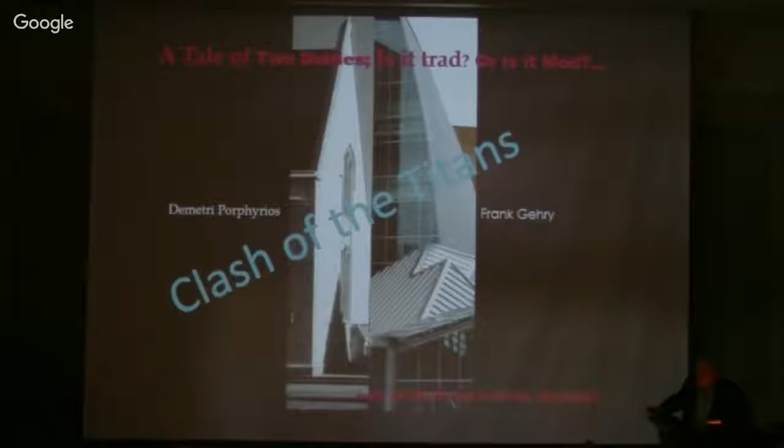At the time, there were two buildings happening at Princeton, one by Demetri Porphyrios, who I'm sure you know, and another by Frank Gehry, who I'm sure you know. They were about 1,000 feet apart from one another. Here is Demetri's building—it's a residential college for about 450 or 500 students. There's a great long walk that runs through it, near the southern end of campus, past a couple of other residential colleges, and it ends up right at the crux of Frank Gehry's building. So these happen simultaneously.

The world didn't really know what was going to happen—how could an institution make buildings that look like these two simultaneously? Is this institutional schizophrenia, or is it responsible development? In some senses, it's both—born a little out of fear, a little out of necessity, a little about what the donors were interested in doing. This is called Whitman College, whose principal donation came from Meg Whitman, who ran eBay for many years, a Princeton alumna.

And this was the gift of Peter Lewis, who was from Progressive Insurance Company, also a Princeton alumnus. He had done a lot of work and was enchanted by Frank Gehry. Frank Gehry designed a house for him—it took around 27 years to design and never got built. So both of these buildings were happening simultaneously at Princeton.

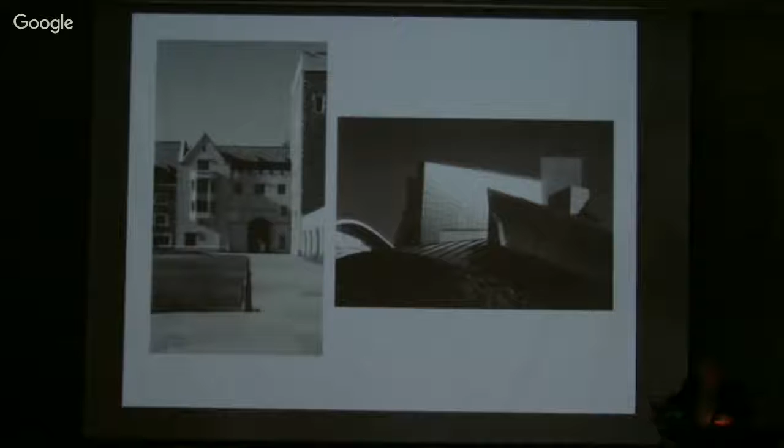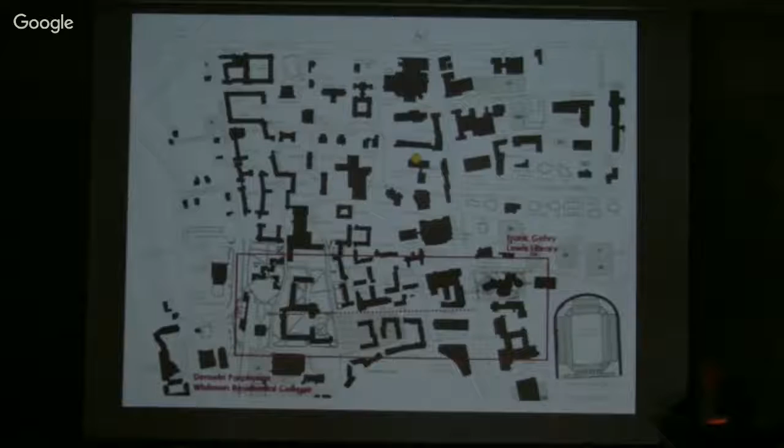Let me go back one thing—the first class I taught at Princeton when I got there was a third-year graduate studio, and that's where Demetri was sitting. At that time, he was a determined modernist, which was also interesting. Not to say it's a problem that people develop their thinking, because we all do, but it's an interesting transition period.

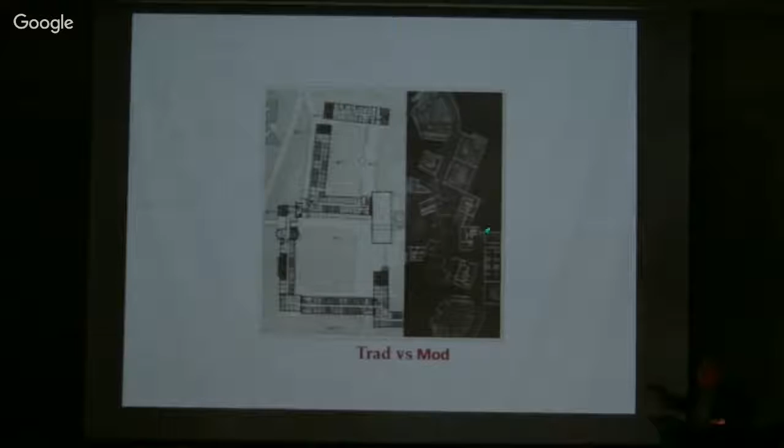So here are essentially the two plans: the traditional, configured plan that embraces space, as compared to the collection of objects that occupy space. That's model photos of each.

I got wonderful renderings from Demetri's office and wonderful CATIA drawings from Frank Gehry's office, where by using the registration marks you could assemble this building and see the various crazy skins go on after the structure was manipulated, etc.

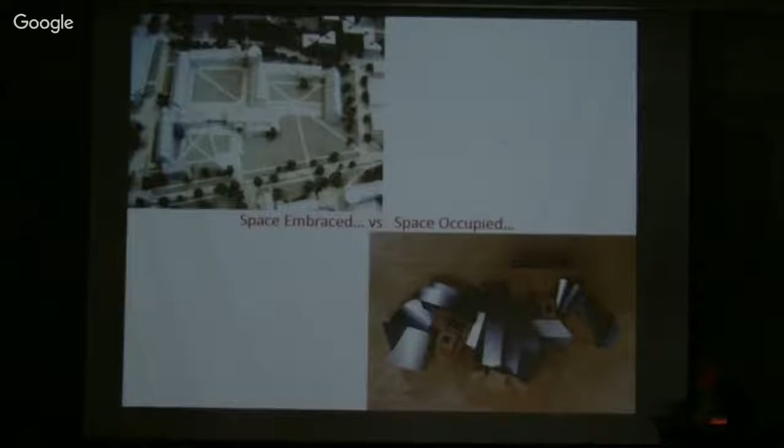So again, the extremes happening simultaneously on the same campus, and nobody really quite knew what to make of them. And people still don't know what to make of them. Because I'm an architect, everybody will always ask you what do you think about X and what do you think about Y. At the time these were going on, people were saying, what do you think about those two buildings going up simultaneously? The only thing I could say was, it's just kind of interesting.

You've got to evaluate them differently. You've got to talk about the Gothic building in terms of the other collegiate Gothic buildings on campus and see how they stack up. It's not a great thing or a bad thing to do that. And in terms of the Gehry building, you can't deal with it in conventional architectural terms because it's not conventional architecture. You think about it maybe as sculpture.

You can think about it in terms of its use as something of a social arena, because although it's called a library, it's actually one great big communal study hall where men and women students can meet one another, among other things.

Moving on, trying to find what the definitions of things are. There is no prescription for the way we live our lives. The Ten Commandments tell us what we can't do, and what's left over, the space in between, is where we can, what we can do. That's permissible. Follow that with our legal systems, and basically it tells you the same thing. You can't do this, you can't hit people with your car, you can't shoot them. But some of them are really quite akin to the Ten Commandments. How you conduct your life is what we don't tell you about in between.

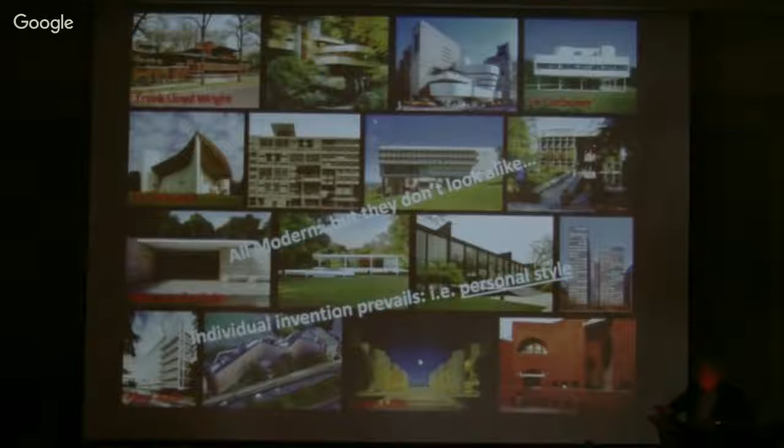A premium on invention. I think it's amazing that the fertility of minds is such a high level that without anybody telling people what to do, they and we collectively can continue to invent new and remarkable things. But personal invention, personal style.

Here, I think this is an interesting statement, and I promise you I wrote this before I knew that the accrediting board was coming. I promise you, I can show you this was printed at home, and it's on there. So good luck with the accrediting board.

They will bring skepticisms, as I'm sure you know because you've faced them before. I don't know what they do these days, I used to know what they did, and for a while they had the screwiest set of criteria where you define yourself to us, and we'll determine whether or not you fulfill your self-definition. If you defined yourself as a place that made motorcycles as a way to do architecture, and if in fact you were a place that made motorcycles, you'd be accredited.

But I think what's interesting is that because of the inevitably prevailing skepticism about a school that teaches and focuses on classicism and traditional architecture in today's world, where it's rampant technologies and so forth, I think it's inevitable that the school has to prove itself. You know that what you're doing is fine, but you do have to prove it repeatedly. And frankly, I think that's kind of healthy. I was the so-called director of architecture at Princeton when we had a visit, and so I was in charge.

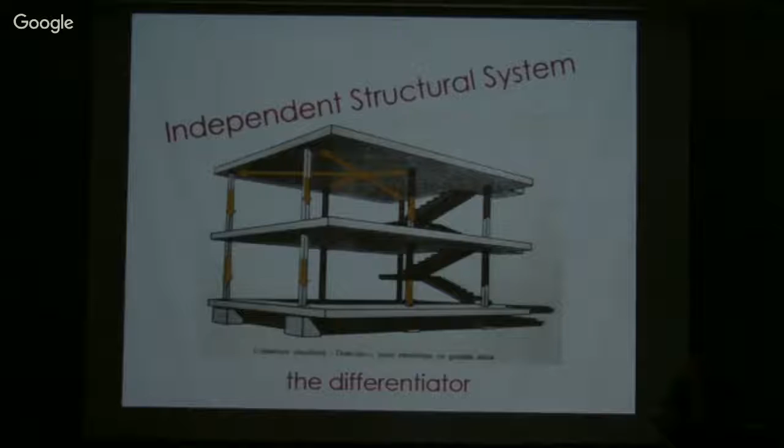But going to the comparison of the two, I think the first person who put these plans together this way was probably Colin Rowe, who was a dear friend who died a few years ago. Colin's article was about two buildings: one was Le Corbusier's Villa Garches, done in 1927, and the other was Palladio's Villa Malcontenta - I forget what it is, 1518 or something like that. It'll show up on a subsequent drawing. But the point supports - these points are exaggerated to make a point.

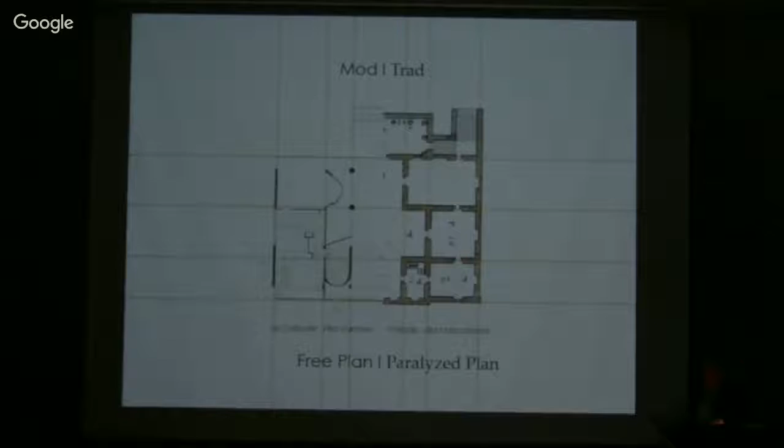The point-supported buildings permit the walls to be placed wherever anybody wants. Thin exterior walls, because they're not supporting the structure of the building or the floors, as compared to the cellular, heavy-duty, compression-absorbing walls of the Palladio house.

So if you look at this, it's got a free plan, but it's got these floor planes that are there, and they're insistent, and they have to be there because the columns have to hold them. Can you cut holes in that floor and have space go through? Yes, but inherently, it's still a horizontal planar thing.

As I said, it does liberate the facade. We'll look at that in a sec.

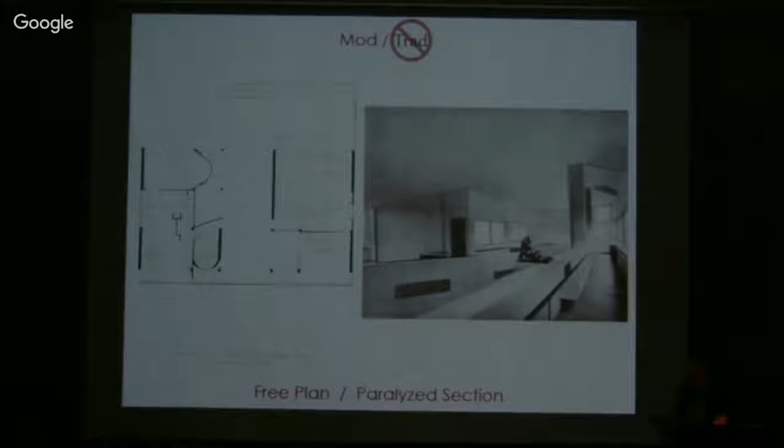By contrast, the essential characteristic of the cellular plan is what permits this to be shaped really as sculpted space, if you will, absolutely perfectly natural through the vertical extrusion, with heights determined by preference and design hierarchically. So the two are in some senses fundamentally divergent from one another.

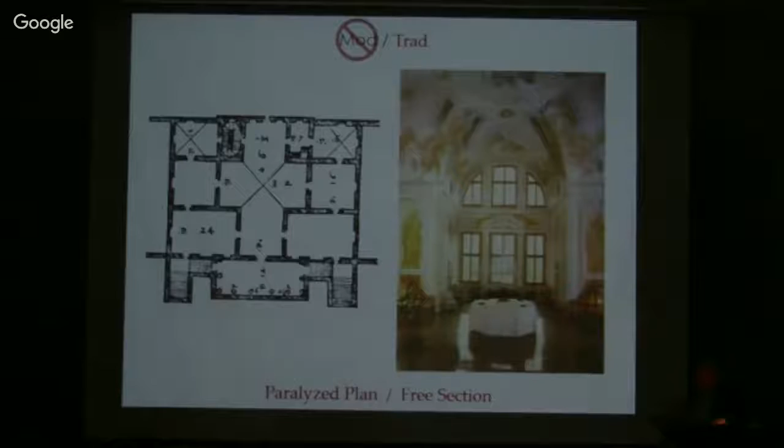So looking then at the two, try to imagine what it must have been like in the 1920s when you came upon this building for the first time, with all glass apparently visually supporting some great big mass - well, it's not really masonry, it's stucco, but you know that no matter what a building surface is, it's got to be heavy. It's an astounding condition that runs these ribbon windows through, and the only way that's possible is because the independent structural system enables you to suspend these great big solids from the edges of those slabs.

And imagine also trying to figure out what would cause one to say this building and this building are sort of cut from the same bolt of conceptual cloth. Well, the exterior is obviously not literally - so the previous slide that showed the grading of the interior, it's really about the underlayment of the organization of the plan that I'm talking about.

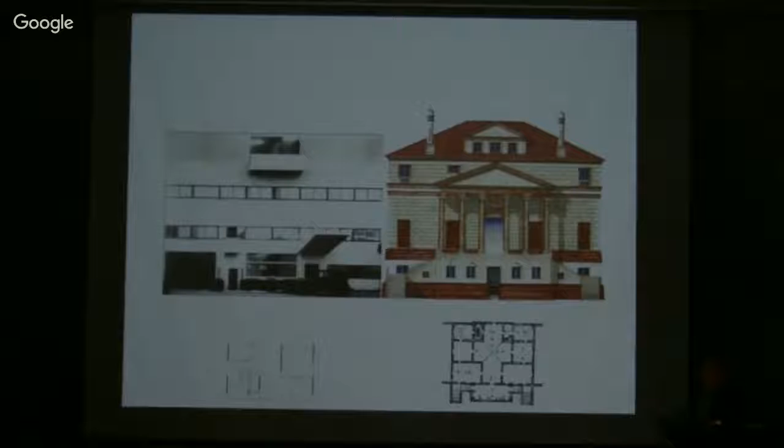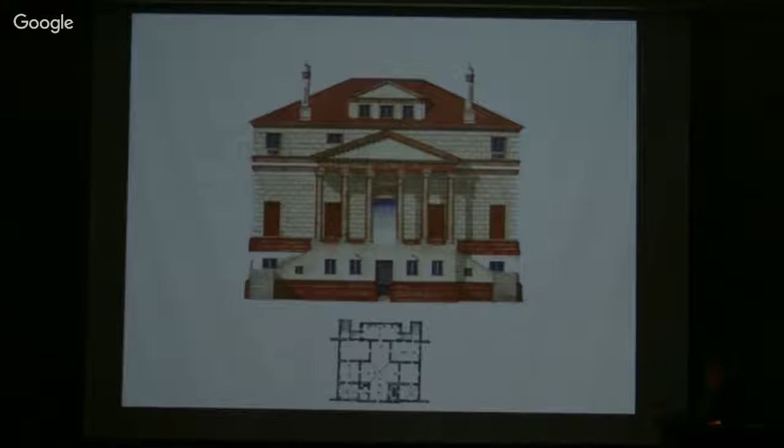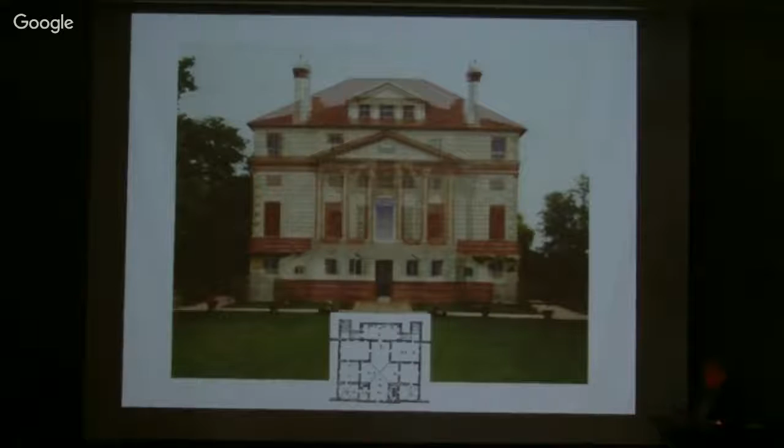But let's compare them. I don't think anybody's ever done this before. First is just an exercise in looking at the Malcontenta, just for its internal consistency, going from the front facade through superimposing the back facade on it, and you can see it from the plan. To me, this is really an exercise in consistency, where the openings of the plan read all the way through, the secondary zones read all the way through, the pediment of the front of the building, which is column supported, is complete.

When you go through a little further to the back side and you realize that great big double-height space that we looked at inside is up through that - it's higher than that, so it cracks the pediment, as if it's the space inside that's creating the back facade. There is a really strong and interesting representation of that. So you get a sense that there is an incredible consistency throughout this building.

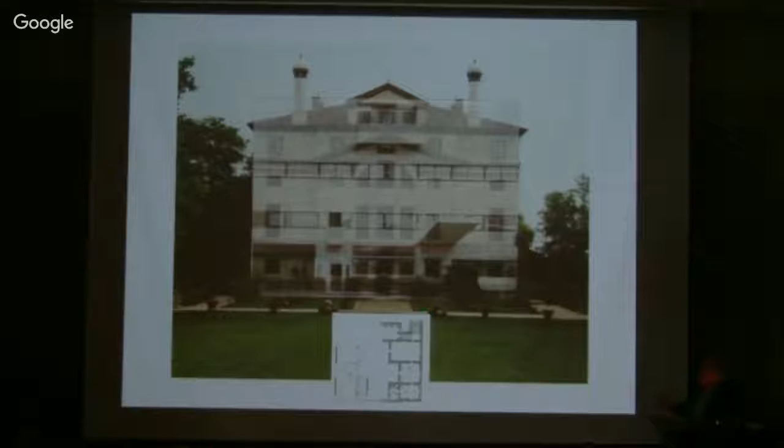And then if you lay Le Corbusier over that, you can begin to see again that the observations that Colin made are really quite amazing. Here's the B zone, which is the smaller one - it's A, B, A, B, A. The smaller zones run through the entrances and where those little balconies are. You look at the big thing up, the big balcony up in the top - it sort of absorbs the dormer height at the top of Palladio, and it works with both front and back. It's kind of amazing.

And it was no stretch, by the way, to overlay these two things. I mean, it was really quite trivial. I kept the proportions of both intact, and it was actually pretty easy to do.

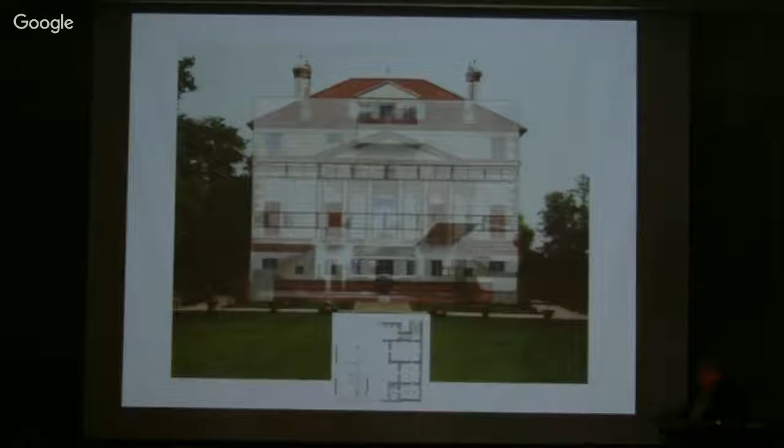So beyond that, I'd like to take a little excursion - well, it's not really an excursion - I'd like to look at some work by Michael Graves. I think he felt this place was an important place. I think he loved it. And from what I know, this place appreciates him. And sadly, he left us last year.

But I'd like to look briefly at the span of his work with these ideas in mind - the traditional times and transitional times, rather - beginning around 1969. And as I'm going through this, think about perhaps reading this in time in the opposite way. If Michael had been of a different era, or even the same era, he could have done these buildings almost in reverse - or one could have, he couldn't, obviously, he did them the way he did - but in terms of the idea development, they could be read in reverse as the world went from traditional buildings through modern buildings.

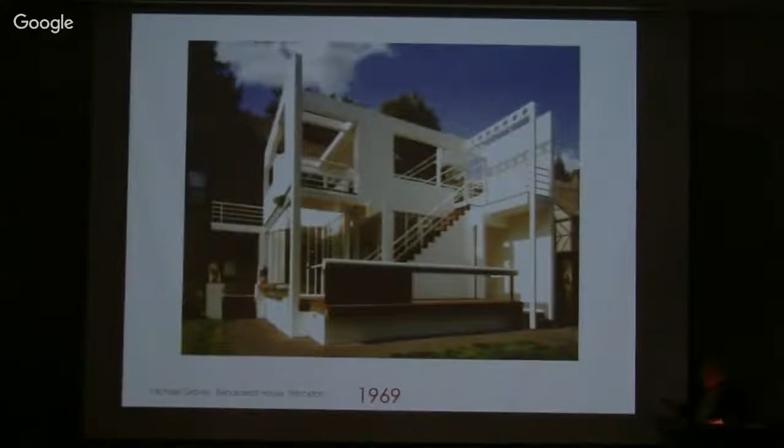Moving into a rapid transition a few years later—unfortunately I don't have better views of this—this was called the Crooks House, one of a couple of transition pieces from the more abstract modern to the more figural later buildings. It engages landscape, probably the first building Michael did that engages landscape as part of the fabric of the idea and the thinking.

But that exists more in plan and volume, and the building itself was almost uniquely an abstract painting. There was one other building he did—I didn't have a good picture of it—a house in Princeton where basically he didn't do the house. It was a small, very tiny addition, just a paint job that showed the architecture.

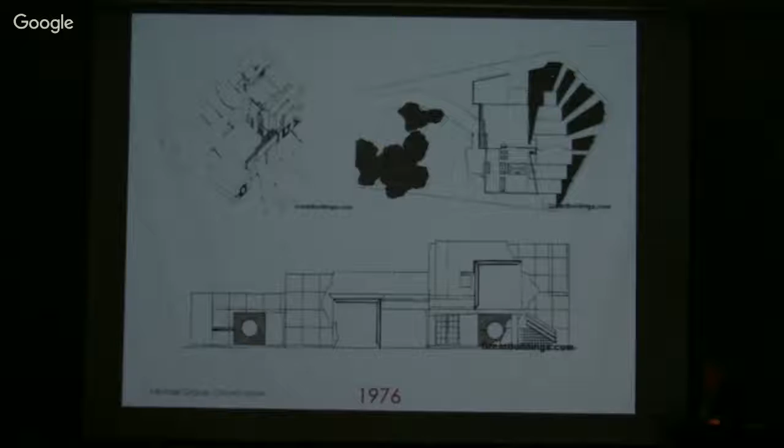But it's a combination here of the abstract landscape, the beginning of the landscape development, and the abstract paintings. To me, this is an amazing piece of work, and I'll come back to it. I just wanted to put it in its right place in the sequence. It's amazing because it is, I think, transitional.

It begins to merge the ideas of traditional forms that demand modern tectonics. As I said, I'll come back to this because I think it's pretty amazing.

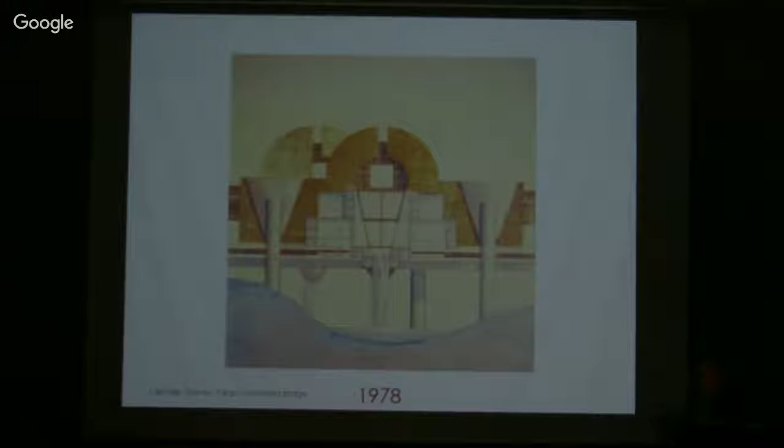Around this time, this image shows up in the world—I reclaim the quote, and I'm sure this image is better known here than most other places. It was an outrage, absolute outrage. People were pissed off for different reasons. Some were pissed off because what the hell is anybody doing making full-blown classical architecture at this point in history? Others were pissed off because how could you bastardize this thing by leaving that part blank? And what the hell is this freestanding thing doing, pulled off from where it should have been?

And if we put it back, you can't put that column back with those columns because it's a different column. So I was one of the people who was pissed off—until I started thinking about it. The more I thought about it, the more I understood it as something that represented an idea, or series of ideas, that you can represent classicism. You can interpret this in ways that are unexpected, perhaps bordering on unethical. I don't know, that's not a fair statement. But depending on who creates it, the ethical statement could apply.

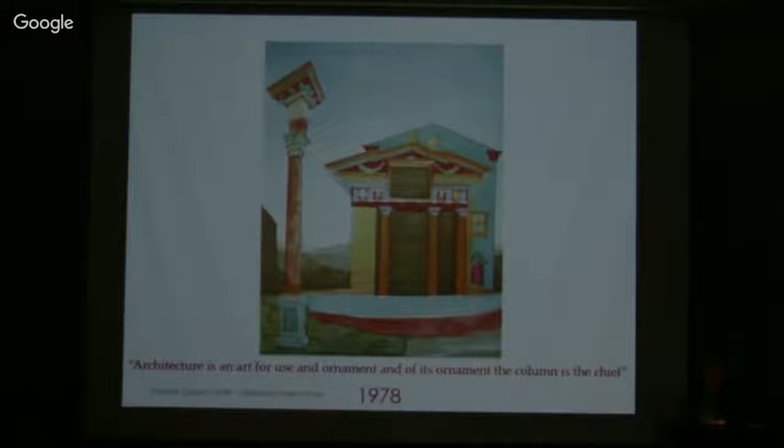I find it utterly fascinating because to me it's trapped between wholly traditional and really abstract thinking. Every time I run across it—and now since I plucked it from the web, I can look at it whenever I want—I know I revere it now. I'm not pissed off at all. I take that to be my own mental growth to a greater degree of maturity.

Around the same time, the following year, Progressive Architecture magazine asked me to draw what would become the cover of the last issue of the 1970s. They called this 'Beyond Modernism.' The idea, I think, is somewhat obvious: there's a classical portal and a modern portal doubling up together, through which a number of modern architectural monuments are situated in the landscape of ancient Rome. This was drawn over a photograph of the EUR model of the city.

And so embedded in here is the New York skyline, Kahn's Medical Research Building, Terragni, one of Corbusier's redent blocks turning into the Claudian Aqueduct, Mies's brick country house, Le Corbusier's building at Chandigarh, and on the Campidoglio the Villa Garches ennobled as the rear facade, the front facade, and the plan exposed. Down the road is Frank Lloyd Wright's Guggenheim Museum, and a little Aalto over here by the water, as it is in Cambridge.

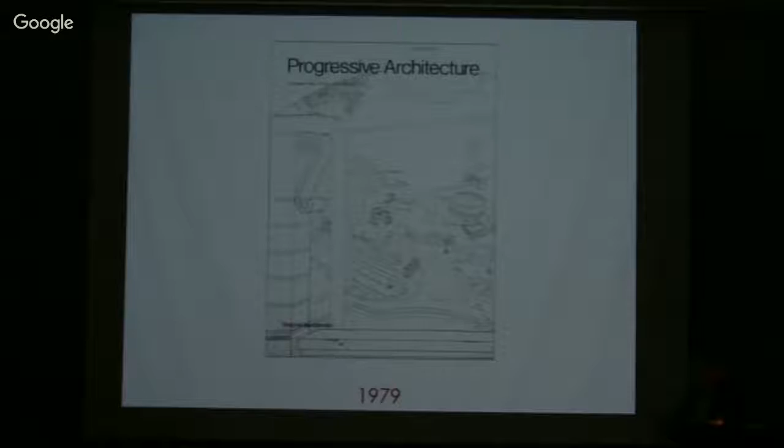So modern architecture becomes part of history at that point, and the game is merged, and it really represents the temper of the times, and at that time, with Michael, it outraged the world probably more than the Thomas Gordon Smith drawing.

Because Michael outsmarted the local stars in this. This was a competition for the Portland building, and no one else fulfilled the program requirements and the budget. It came with a budget requirement, so Michael outsmarted them all and made this building, a huge built piece of classical ornament in a variety of ways.

One of the ways he won, he told me, was they had to submit a construction estimate, not as an estimate, but as a guaranteed price, and they did the competition with a contractor. The contractor, local to Portland, either knew or learned that the perimeter of the site had muck and couldn't support more than a couple stories of building, whereas there was much better bearing further in. So they saved a huge amount of money by building based on a reversal of what the ground would support.

But the other guys, Arthur Erickson and I've forgotten who else was involved in the competition, didn't meet the budget. So they all claimed foul and tried to have the result reversed, which didn't work. This outraged the world, and it still outrages the world a little, as people now say it doesn't fulfill modern requirements. All the criticism leveled against it now, environmentally and so forth, for how it's used inside, really had to happen because of the budget being so small, the small number of windows, the small size of the windows, and so forth.

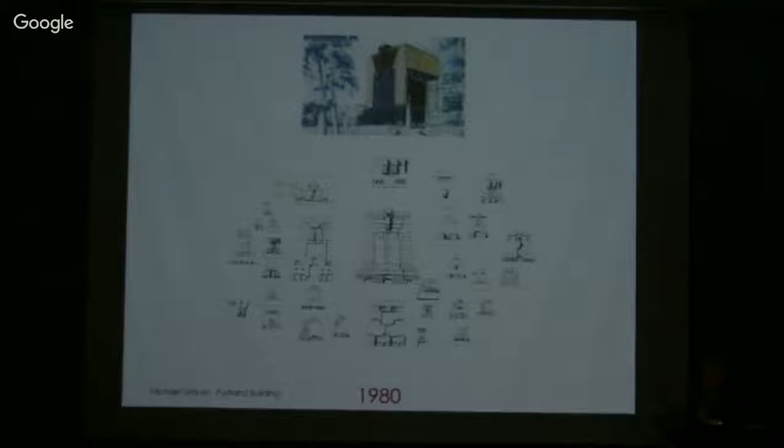There was the Plocek House, which spanned a good number of years, so I didn't quite know where to put it here, but it's part of the thought process of the development. I think this stuff is inventive, and doesn't come from anything literally. What Michael was doing here continued wholesale in the Portland Building, traditionally based urban response, traditionally based forms that were really invented out of Michael's preferences. The rules aren't the rules of traditional architecture or classicism, as much as they are Michael's rules, as he created another version of a modern style, if you will. So again, it's eclectic, growing out of Michael's origins in modern thinking.

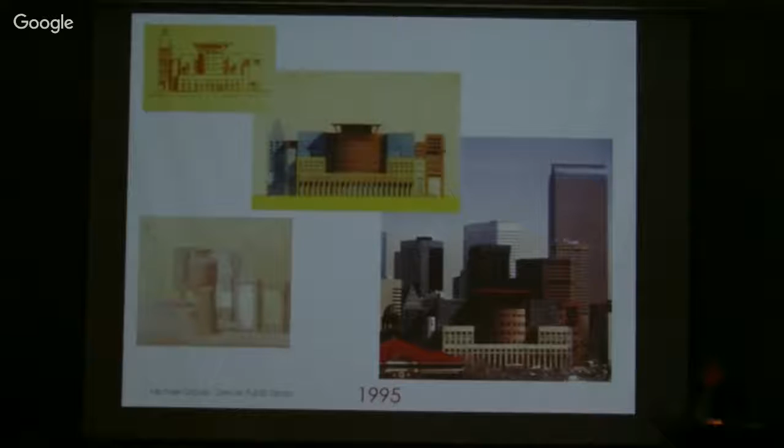The Denver complex is really quite extraordinary, and I put Morandi in here because that's really what it is, a sort of Morandi composition, but it's a contextual condition. As part of the competition, they had to preserve the original part of the library, which was pretty big, too big to be eaten and absorbed into a building. So what happened was an assemblage of parts creating a complex that included the original piece as one of Morandi's objects was the strategy. Again, the appearance of things is Michael's version of his own preferences for architecture.

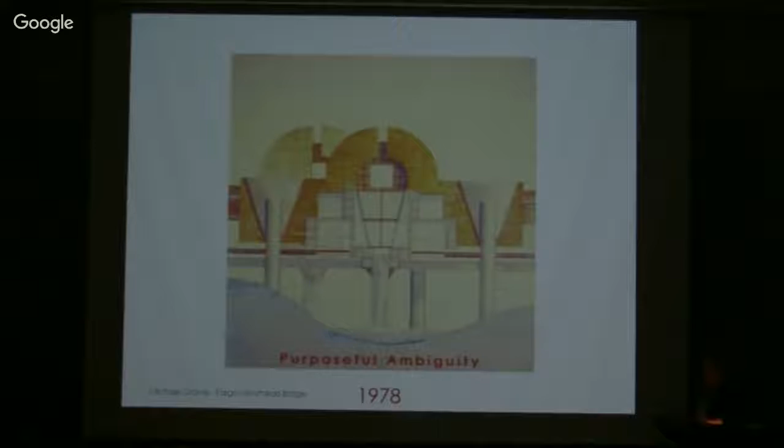It could only be built using modern technology. I would love to have seen what he would have had to do to realize it. I actually wish he had had to do that, because I think it might have slowed him down a little bit—it was just so utterly interesting to see this. Maybe this is just my own set of preferences, and that's why I call it purposeful ambiguity, because I think the ambiguities are there, and maybe it would not have been possible to do anything tectonically credible. I don't know, but I really wish he'd been forced to do it.

Moving on, about the same time, a little bit later—I'm just making almost random selections. I could be choosing other projects; I'm picking ones that I find particularly interesting.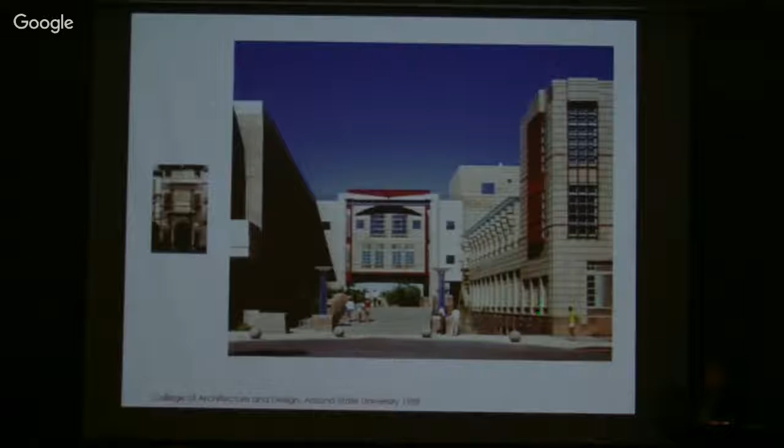It became really the cipher for the entirety of the new project. I was fascinated—one of the faculty members at ASU said the building was Johnstone and Mackintosh having lunch at the Arizona Biltmore. That's the Arizona Biltmore, a glorious place, a la Frank Lloyd Wright, built by an acolyte named McArthur, who I think was an architect descendant of the McArthur House in Oak Park, but I'm not sure of that. And it did, in fact, influence this.

The center of this building is sunken—that's the first floor. This is a level below, a courtyard off of which, enclosed, the major auditoria and so forth are located.

Spanning from 1989 to 1993, we did the Howard Hughes Medical Institute's headquarters and conference center. The Howard Hughes Medical Institute was then the largest private philanthropy in the US, if not the world—since superseded by the Gates Foundation. But back then, the Gates hadn't gotten so much money yet. We were included as the 13th of 12 firms and persuaded them through idea and charm to hire us.

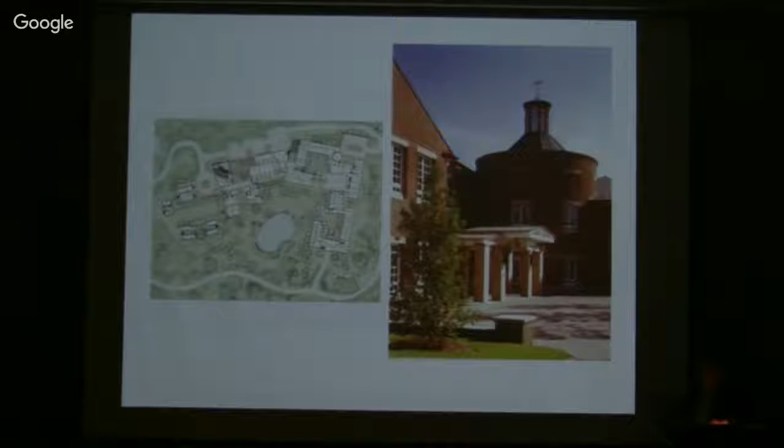As part of the selection process, they asked if it were possible for us to do our best work if we had to use traditional forms, etc. I said, absolutely not—yes, we can, we'll do our best work. So here you can see it's nothing but a string of enclosed offices that are broken and fractured and connected to one another through a variety of means.

There is in the center a conservatory, which is really like the outdoor quadrangle, although it's enclosed. They had a very important legal division, so we made them a law library, which is adjacent to the entrance.

The courtyards within the complex are connected both inside and through portals, which can be opened and closed. Then it gets less formal as you go out past the dining, which serves this sort of promenade route that runs through the whole thing, with dining and service coming in from behind. It serves both the headquarters and the conference facility.

They bring their researchers, located around the country at colleges and university medical centers, back for conferencing and also for continued scrutiny to see if they will renew their support. They're incredibly generous with faculty, but the researchers have got to continue to perform. So there's guest houses and so forth floating out, with one common entrance—you come in here for drop off at the headquarters. But then there's this sort of country road that runs around the site, getting people to the conference center. They wanted to have the conferences in different places, but knew that was totally impractical, so we gave them a different place by giving them a long road.

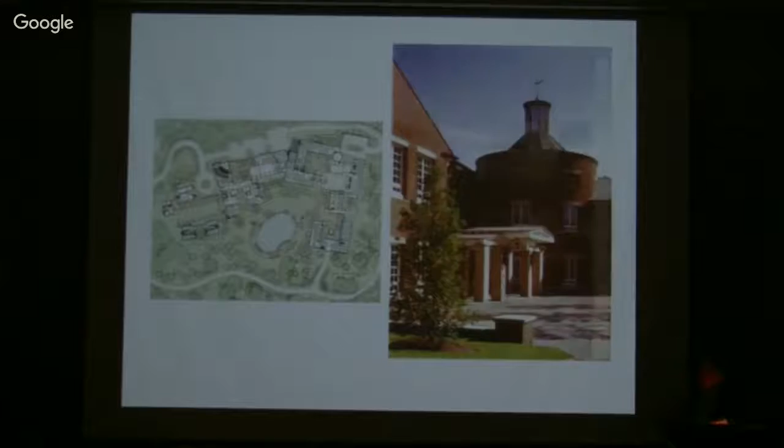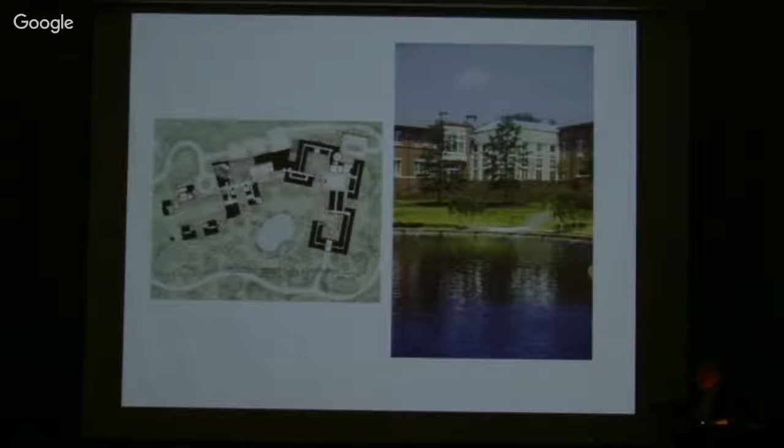So headquarters on the right, this is the parade route going through all the common and open facilities—the auditorium of the conference center, the open spaces and common spaces of the residences. It's something I used in teaching to explain to freshmen: it's the yolk of the egg that is one of the great organizers, visually and spatially, of otherwise irregular arrangements of parts.

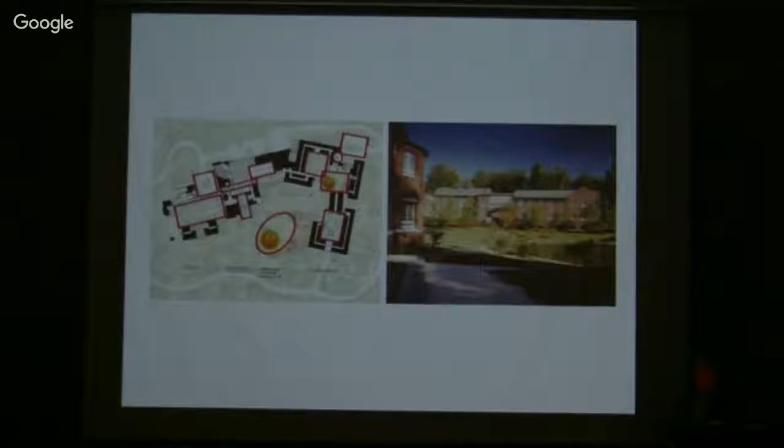Simultaneous with this, almost exactly over those same 4 years, we were doing a laboratory building for materials science at Princeton University. The building is an abstraction of the idea of materials science, coming from assumptions about silicon technologies and fractals and so forth.

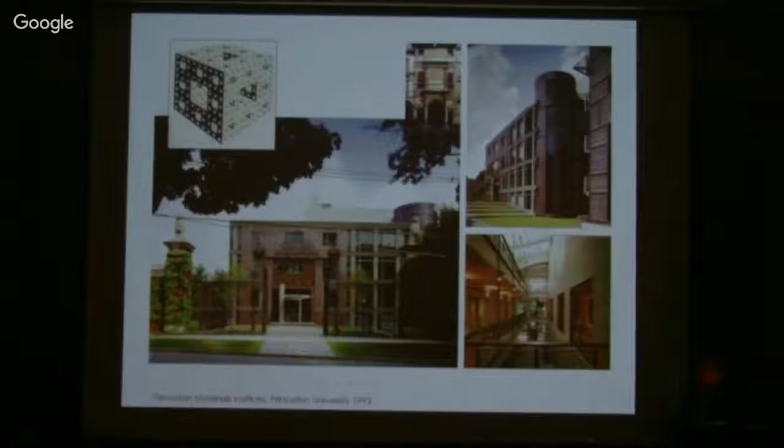Essentially, the frame of the building is like silicon, and what happens to that frame—things pushed into it, scratched on it, erupted from it—are all analogous to what happens to silicon to characterize it, to make it usable. It's a completely abstract building, but very functional and practical. It works as a laboratory building with offices and so forth.

This pattern also comes from the world of fractal geometries. It's also an homage—this building was donated by Gordon Wu, who also donated Wu Hall, which was Venturi's building. So this was really a connection back to the figural panel over the door of Wu Hall elsewhere on campus.

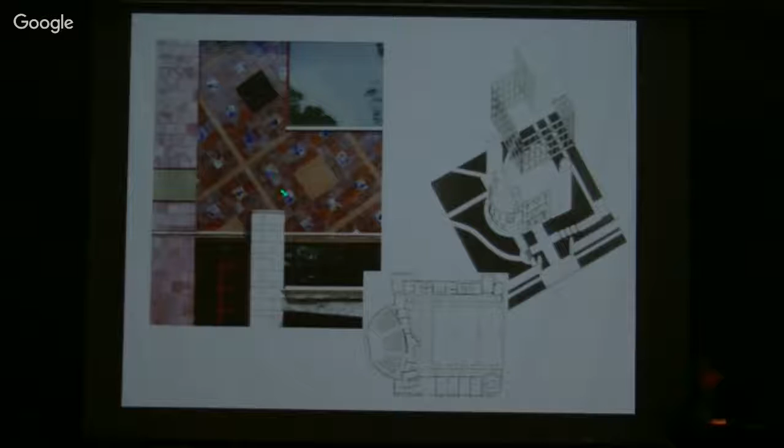The materiality of this changes, and it's significant. The ways references to history work, through a combination of embedments of things into the walls, is also a play on the characterization of the surfaces of the building in relation to the ideas about material science.

But seeing things like this, you never know whether any of those oddities were really intentional. Well, the arch is intentional, but whether this being wood or that being wood—maybe they just didn't have a piece of stone that big that day. So there's a kind of seeming arbitrariness to the way things are embedded here.

But also, since material science at the time was about manufacturing artificial materials that did the same thing as real materials, one piece and another piece might appear the same, similarly colored—one is stone, one is steel—to continue that idea.

We did a fascinating project at Cornell University—this was the first of three that we did. What you see here is a combination of a sadness and a necessity.

So essentially, we built this building on the footprint of the existing, original building. This is almost exactly the footprint, except where the new portion was added. The courtyard space was exactly the same size as what was in that previous open backside. The reconstruction of these walls have exactly the windows, although not the portal through, but ghosted into just simple frames. We also reused the lintels and the sills.

When it came time to figure out how to enclose this, we did some historic studies and learned that the building originally was made in the model of the University Museum at Oxford, although not this portion of the building, since it didn't exist then. So we appropriated some of the geometry of the courtyard infill from the Oxford building and reinterpreted it as sort of a steel lamella structure with some cables to minimize the thickness of things.

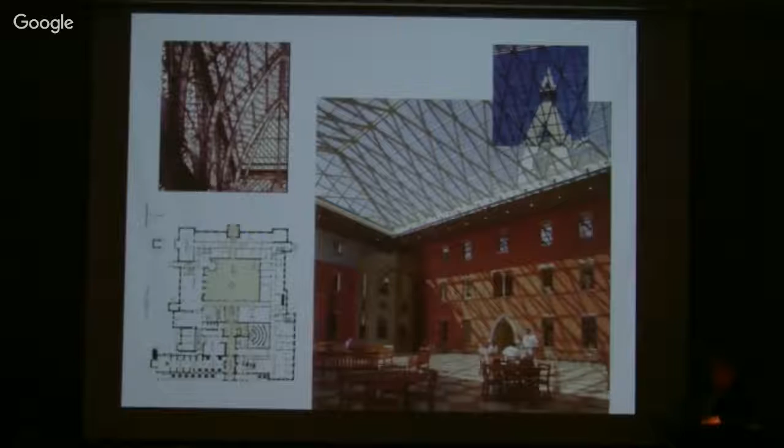And created this as the heart of the building. It's always just filled with people and activities, blood drives and social events. Once wireless showed up, it became a Wi-Fi center, and all of the tables are filled with people doing group study things. It keeps changing its use moment for moment.

So in order to make it as contextual as possible, but not run into the problem of a historic preservation add-on that replicates the building, we kept the so-called story of the building intact. The spiky spire on the stairway is made not out of slate the way the original spires are, but out of a diamond pattern metal. The appropriation of some of the black and white polychromy was pulled through in a more abstract pattern.

The dormer gables were appropriated as windows in a reading room in the library that's since been transformed to something else, because they don't need the library anymore—everything's online. It was really a careful exercise in trying to be as contextually compatible as possible without replicating any of the original stuff.

At the same time as that, we were working on another business school building, this one at Columbia on Amsterdam Avenue and 115th Street. This, again, was another influence from that and from Columbia's buildings. There's basically three materials: Texas pink granite, limestone, and red brick. A figural condition within an abstract pattern, again, not dissimilar from the Princeton building.

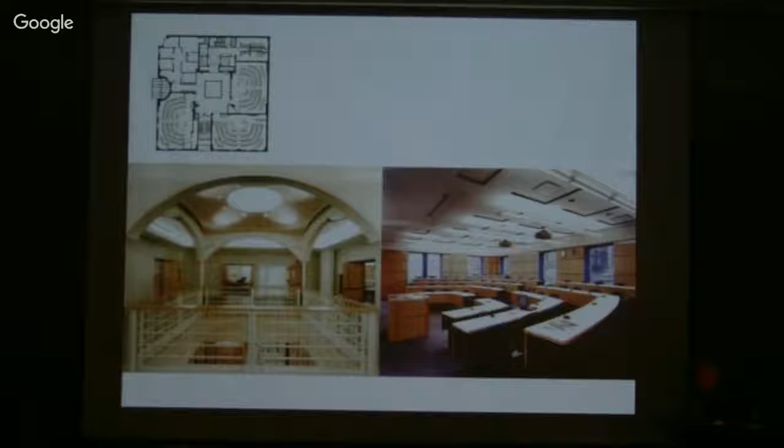One of the things that's interesting about this is that stairway you can see is an exit stair, made with what's called FireLite, a clear fire-resistant glass, so that you can actually get light all the way through from the outside of the building into the center of the building through that. It was technically sort of an interesting set of moves.

Another problem or project at Cornell, contextually very important and critical, was the creation of the North Campus residential plan and residential halls. We did it in conjunction with Charles Daggett of Daggett Saylor. We did the residence buildings, which are these buildings here, and Charlie did the common building. We worked through that in a planning exercise that happened for the first several months, and then the projects got divided up.

So this is a before, and this is an after, pretty much from the same aerial viewpoint. When I was an undergraduate at Cornell, this trefoil building had just been built, and I could not imagine how anyone would have had half a brain to do such a thing, nor could I ever imagine I would ever have a chance to do something about it. And so by positioning of these buildings, the spaces around this thing are actually pretty good now.

The exterior of this is sort of a melange of transition between this building, which is all stone, this building, which is a combination of brick and stone, this building, which is brick and God knows what, peanut brittle, and this building, or these buildings, which are all brick.

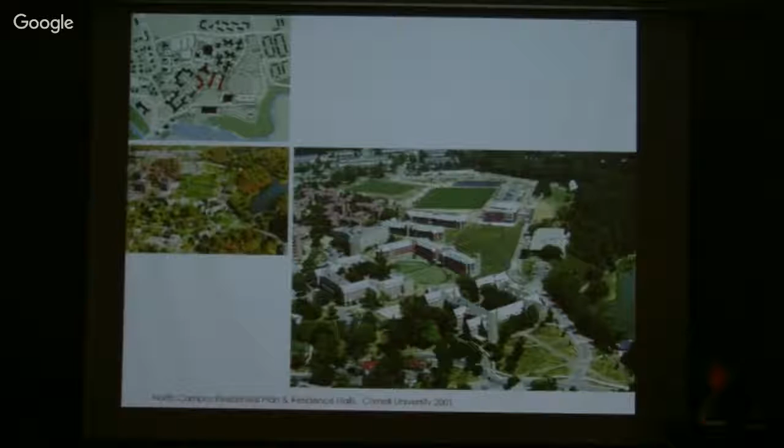And so what we did was to devise a sort of a fade and dissolve, almost a cinematic approach, saying it's going to start at the lower end, it's going to be all stone, and then combinations of brick and stone as it goes all the way up. And when you get to the very upper end, this same facade facing in the opposite direction to those all-brick buildings, it's all brick. And so it was a fascinating exercise to do.

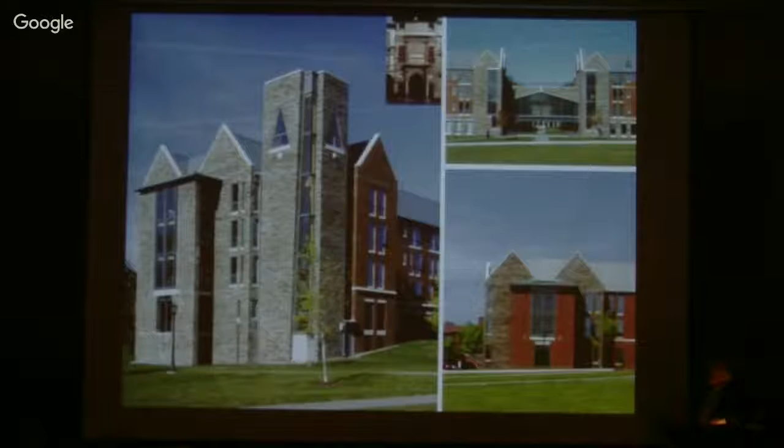Again, some of these elements, which are all lounges at the ends of the dormitory halls, are all resident stuff. All are still somewhat derived from that fascination with the Palladio facade.

Out of the blue, this is something called the Laboratory of Ornithology. Cornell has a big ornithology center. They're sort of the bird center of the world.

And this whole area was a combination of wetlands and reconstructed wetlands. There's a great big pond here that actually was dredged in 1957. And so the dredged out pond, which would attract the birds, there was a sort of an ecosystem in this area that the originator of the Laboratory of Ornithology discovered was a real place for birds. And so they dredged out this pond, and they had a bunch of shacks and things, and then they built another building and another building and another building.

By the time we got here 50 years later, the dredged out pond was now a protected wetlands. And so even though someone said, well, maybe we could just go get an extension on the dredging permit so we don't have to worry about that, it was environmentally a very, very sensitive set of explorations and proofs that had to be made. And there were acres of wetlands reconstructed and restored that have all grown back.

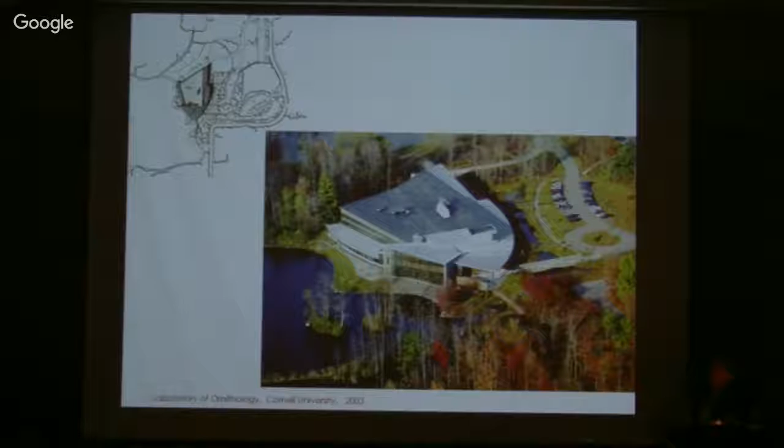It's really quite amazing. So this is a research facility and an observatory and a social place that uses that pond and tries to make a world that is compatible with the natural world around it.

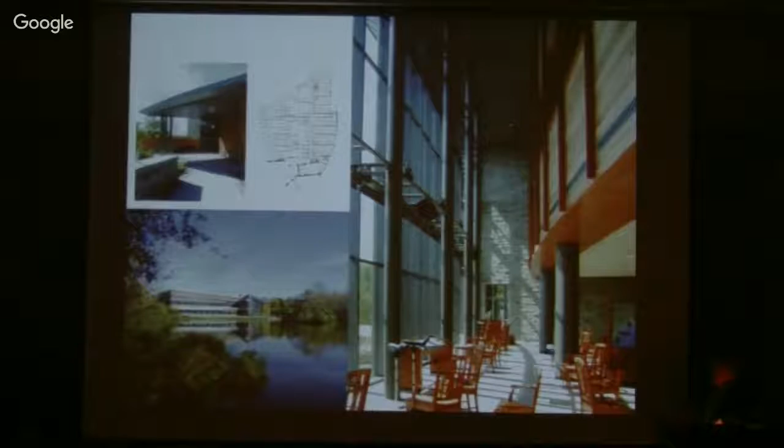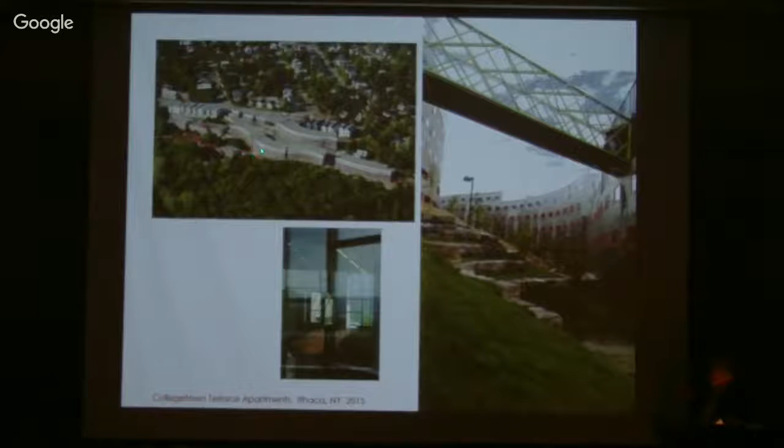There's a stone amphitheater that sits down in between this thing. And there are bridges that go, actually there will be eventually—there is currently, you can barely see it here, but I'll show you photos. There's a bridge that connects these 2 buildings, and coming out of this building, there'll be another bridge connecting to the last building. So this here is from the uppermost building to the second building.

There is a big open pavilion, meaning glazed in, with a great big fitness center. So all the common areas are open and glazed, and there's one bridge that comes through here. This is the back side of this building, so that little nib is where the next bridge will connect, going to the last building.

And so in these open glazed spaces between the residences, which are all embedded in behind the stucco and so forth, there are study rooms and little TV lounges and that kind of stuff. Very elaborate landscape, but no cars.

These are the back sides of some of the apartment buildings with State Street over on the far right. Another facade—actually there was a lot of opposition when we were doing this. People said, well, we'll never be able to see across to South Hill anymore. And so we were strategic in making some major openings.

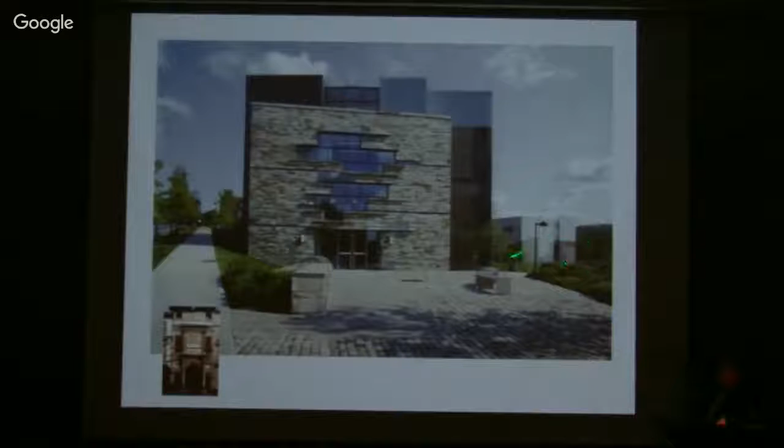This is at the end of a major street coming out down from Cornell, looking across to West Hill, and it's sort of blown open with a facade at the end of it. They actually can see a lot more than they ever could of what they wanted to see.

The last project is one that's about to start construction. It's an unusual relationship, in a place called Collegetown, right next to Cornell—an unusual relationship between the developer and the university, where the developer is building this building, about 75,000 square feet. It will be used by the Johnson School, the business school, and it's a combination of classrooms and supporting facilities, open loungy spaces, and pre and post function spaces for the first 3 stories and another one down below, and then offices above that.

There's some dramatic stairs that run through the open common public spaces. This is the first building that's going to be built to a new zoning ordinance, which allows buildings to be that much higher than previous—well, this is inaccurate. Somewhere in here is the actual top height of the previous zoning. So it's bigger. It will probably set a new thematic trend going forward.

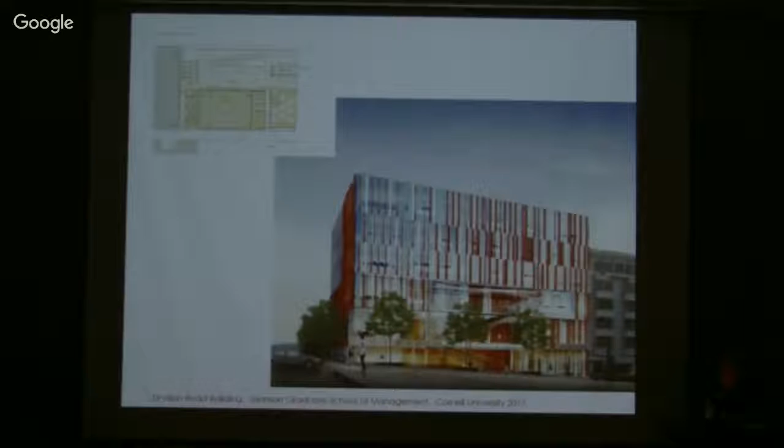It is a combination of glass curtain wall and angled metal fins, and I'm worried about it. I'm worried about it for the same reasons I've been worried about all the other things I've been talking about. So I appreciate you giving me the opportunity to yak at you. Happy to answer questions. And it's been a pleasure being here, truly.

Stunned silence. Yes. Well, I was really looking forward to this lecture, very much for your subject, trying to find a way to bring classicism and modernism together again. You advocate for eclecticism, and I think that's been the path we've been on for a long time now. And I think it actually works pretty good with America, by and large we become one big suburb. So when we take these object buildings and scatter them across the landscape, make sure there's plenty of space between them, it looks fine. Here's my question.

When we try to do that same strategy in the city, isn't a good direction? I compare that to what we're ending up with versus traditional cities like London, Rome, or Paris, because those cities reflect the social order of the people that inhabit the city. You have important buildings, subservient buildings, but they all have a place—they symbolically reflect what they're about and what they're supposed to be doing in the city. Whereas when we fill new cities with eclectic, derived objects that don't mimic any kind of social order anymore, that's an end game I think we're approaching as we replace existing buildings in American cities with these object buildings. What do you think of this? Is this a good end game for us to be approaching?